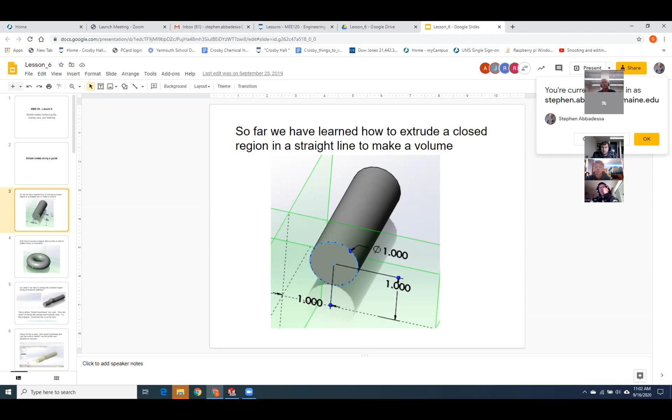So, sweep along a guide. So far we have done extrusions where we drew a closed region and we just pushed it out in a straight line to create a solid body like this piece of rod that I'm showing. Okay, that was an extrusion. Then we decided we're going to draw a closed region and we're going to spin it around some kind of a hinge point or axis. And those were the bodies of revolution. Those were, you know, the wine bottle, the donut, all of that stuff. And those were fun.

Today, we're going to do something different. We're going to do a closed region and we're going to push it along an irregular pathway. And these are called sweeps. So you can imagine this circular profile goes along this irregular guide. And the thing about it is that this profile always stays perpendicular to the guide.

So as we come into this rounded section right here, it begins to tilt back on itself, which is what you're seeing right here. The profile stays perpendicular going up around the top, it creates the hump, and then it goes back and stays straight toward the end. Okay.

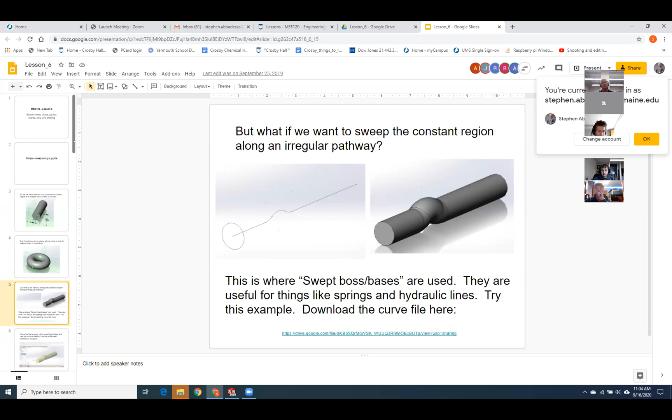If you guys want to follow along with me in the lesson 6 folder, we have something called a Jeep frame. Why don't you go ahead and grab the Jeep frame, download that. And when you open it, you should have something like this. You should have a sketch 1 and a sketch 2.

Uh-oh. I might have to re-download mine. Okay, that looks better. So what was bothering me is when I was prepping for the lecture today, I had moved this guide curve down to the bottom to show you how it could fail. This one should actually work quite well.

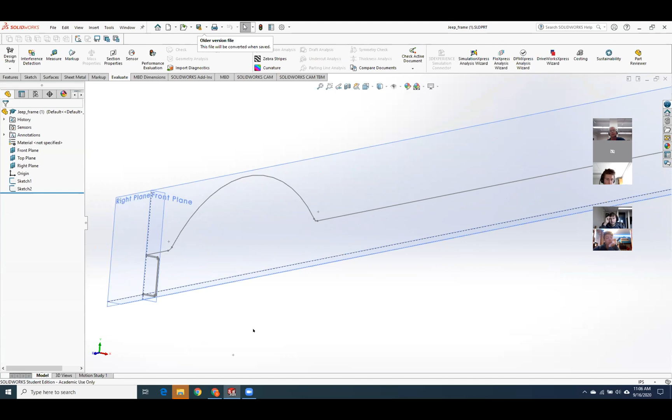Okay, so let's actually do one of these sweep along the guides. We're going to click on the Features tab and we're going to come up to Swept Boss/Base. You get a dialog that looks like this. So we're going to do the profile first. That's going to be your cross section. What is the constant cross section that you're going to move down along the guide?

Then below that, this is the pathway. This is your guide path. We're going to choose up there. And when we say OK, we get this. And this is actually what a World War II Jeep frame side rail looks like. I actually copied the dimensions off it.

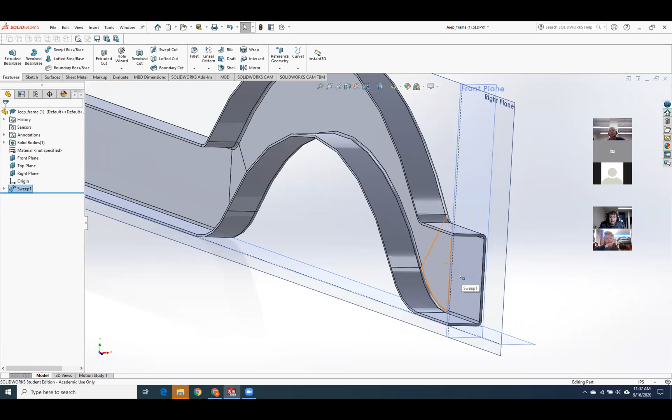Whenever I need inspiration, I go out to the barn and I look around and say, okay, what kind of junk do I have in the barn that I can torture the students with?

So the car actually uses a piece of 1/8-inch thick C-channel, and the tires would be right in here. So when the axle goes up and down over a bump, it moves into this hump and right in here.

Okay, now sweep along guides, they can be a little bit problematic. These generally can be fussier than extrudes or revolves. Extrude and revolve almost always works. The problem with sweep along guides, there's some pretty advanced stuff. And if you get the profile doubling back on itself, you can cause a sweep failure. And let me demonstrate that. So you saw that this sweep worked fine.

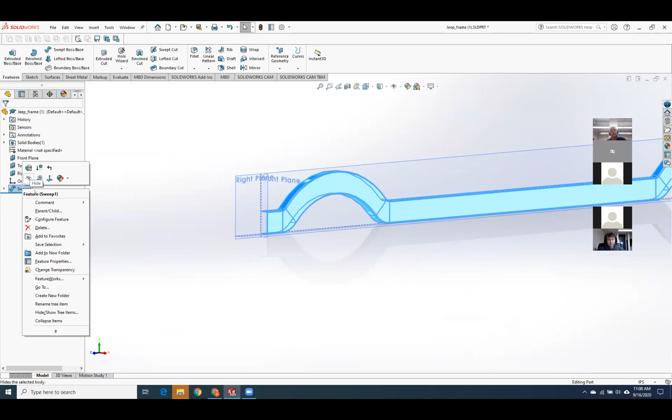Let me delete the sweep feature. And the reason it worked fine is that this profile went down the guide curve, the bottom swung out, so the material as it was being created was not doubling back on itself. It had plenty of radius here where it's not doubling back, and then the bottom kept swinging out. Okay, let's look at what happens when it does double back on itself.

If you go back to the folder, you're going to see something called failed Jeep frame. Go ahead and download that one. And the only difference between those two is that I've moved the guide curve from up here to down at the bottom.

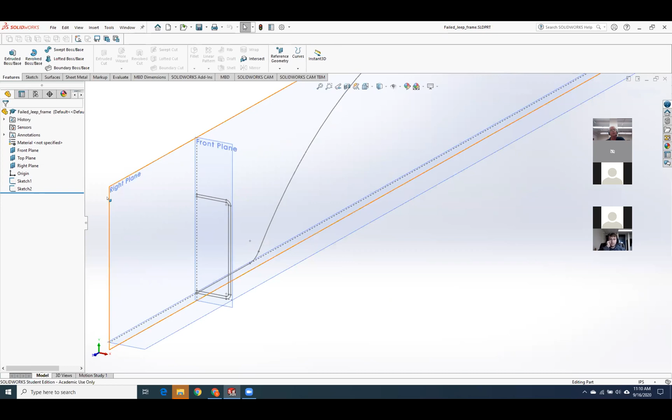Okay, otherwise these two are exactly identical. So let's try it just to make sure that it does in fact fail and I'm not lying to you guys. So swept boss or base, we'll choose the top one, the profile, which is your cross section. Sketch 1, the guide path. Choose sketch 2. We'll say OK. Sweep operation failed to complete.

And what's going on is that as this profile moved down the curve and it tried to always remain perpendicular to the guide curve, it was upright right here, and then the top started swinging back on itself as it went through this tight curve going up. And that created an undefined solid.

So a lot of times, if you're doing a sweep and you get these rebuild errors, sweep operation failed, take a look at it, try to get it so that as the profile remains perpendicular down the pathway, that you're only stretching the material out and you're not doubling back on yourself.

Okay, that's probably a pretty hard thing for you guys to visualize right now, but you're going to be doing a ton of these. When we do the Stirling engine project, I'm going to want to see all of the little wires that connect the Stirling engine, crankshaft going to the balloon piston, and I want to see the little twisted ends. So you're actually going to do the twisty ends, and I'll show you how to do that.

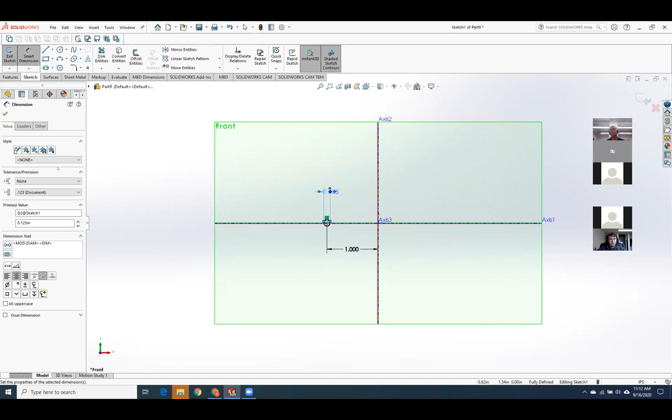So let's see, we'll make that 1 inch. And we will use some 1/8 inch wire. I have a fully defined sketch. My graders will not be mad at me, so that's good. Okay, now we've got to create a helix or a spiral. And we actually have a built-in feature in SolidWorks for doing that. But you have to start off with a circle to define how big the helix is going to be.

So I'm going to create another sketch on the top plane. And I'm going to draw a circle from the origin right at the center out to the center of my wire's cross section. And notice that because I gave the center here and I stretched it out to the center point of my wire, that set my diameter, and I automatically got a fully defined sketch. So I've got location and I've got diameter, all set by geometric relations.

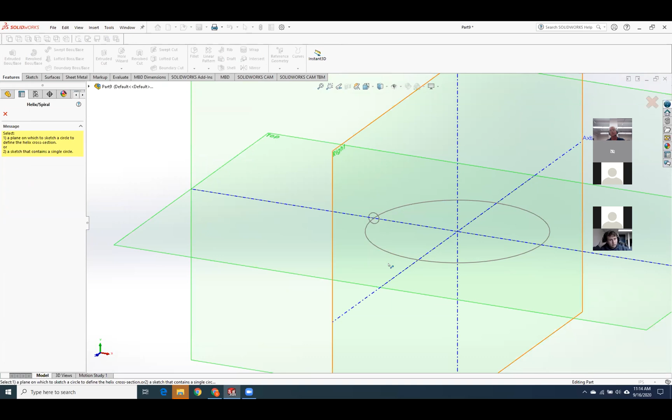Okay, cool. That's all nice. So to get to the Helix tool, we're going to say Insert. We'll come down to Curve. And here's the Helix tool. I'm going to choose my circle that represents the center of the diameter of the spring. And we have all kinds of stuff over here that we can set if we want to.

So pitch. This is how far up I go for every turn. So for every 360 degrees on the helix, I go up 1/2 inch. Revolutions, I've got 4 turns on my spring. I can also change my start angle. For right now, it looks pretty good. I've got the start of my helix right in the center of the cross section of my wire. That's pretty nice.

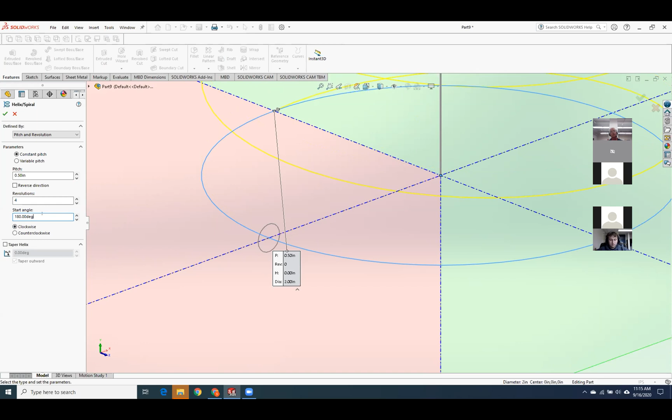If it were over here, I could change the start angle. Okay, so now my helix is starting over there. That might be useful. But I'm going to put it back at 270. So that's all you need. This is by the pitch and revolution method. You can also set the height and the number of revolutions. So if you wanted to say, give me a 2-inch spring with 4 revolutions, starting at 270, you can do it that way. All kinds of options, however you want to define it. I don't really care. We're going to say OK.

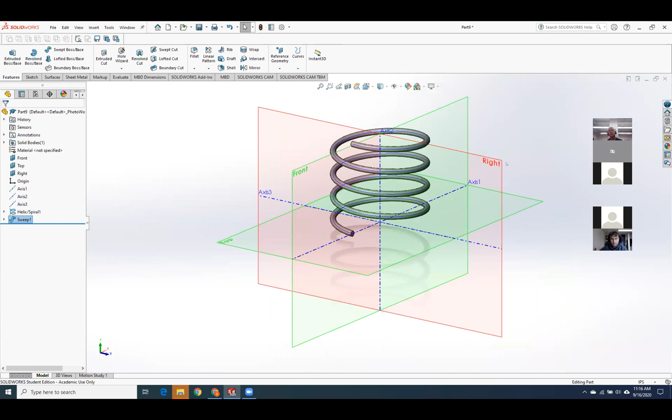And now we'll do our sweep. So we'll set our profile with a little circle. We'll set our guide curve by picking the helix. And magically, we have a spring. Okay, yes, go ahead. Where was that tool? Which one? Swept boss or base or helix? The helix. Okay, so go under Insert, go down to Curve and Helix. Fantastic, thank you.

Okay, so that's pretty much the classic spring, sweep along a guide. So when you guys are out in the world and you're working for Ferrari and you've got to draw, say, the hydraulic lines for the brake system, anytime you're doing formed tubing, like hydraulic lines, really good time to think about sweep along a guide. Hydraulic lines, springs, any of that kind of stuff. Transfer pipes. Exhaust pipes, absolutely. That's where you're going to use this stuff.

All right, let's see what else I've got in your lesson plan for today. So we drew the spring. There's the video if you want to see the spring drawn again. Okay. So are there any questions on that, folks? I know that was fast, but again, until you start practicing this stuff and just start using it, that's when you really, really learn it.

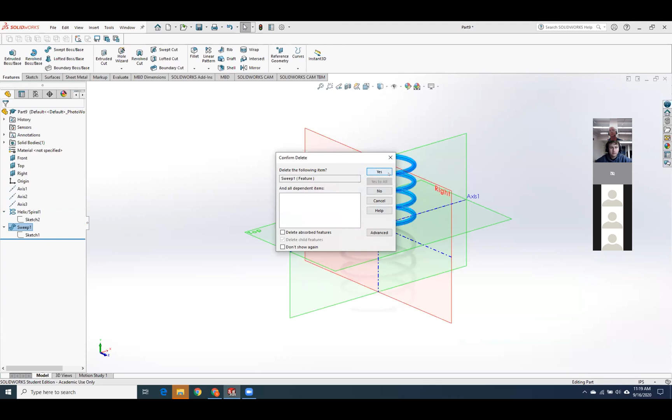So I'm trying to do the spiral on my own again. Yep. So how do I get the circle to go along with the spiral? So the first thing you're going to do is you're going to draw the circle. Yeah. Okay, so I'll get rid of the sweep. Oh, it's two separate commands? Yes. Okay, that makes sense. Yeah, so you draw the circle. That sets the diameter of the helix. So draw the circle, use the helix command, and poof, then it will appear.

Okay, thank you. So if I want to change the diameter of my helix, well, I've got it tied to the wire. So what I'll have to do is go into sketch 1. If I change how far out the center is, so that changes the diameter of my circle that generates the helix, and then the helix gets fatter.

I know that this is kind of not with the lesson plan, but in regular springs, you know how the ends are kind of flattened out. How would you do that? How would you manipulate the end of the spring so that the top and bottom are flat like a regular spring? Okay, so the technical term for that is called squaring. And let's actually do that. That's not a bad thing to do.

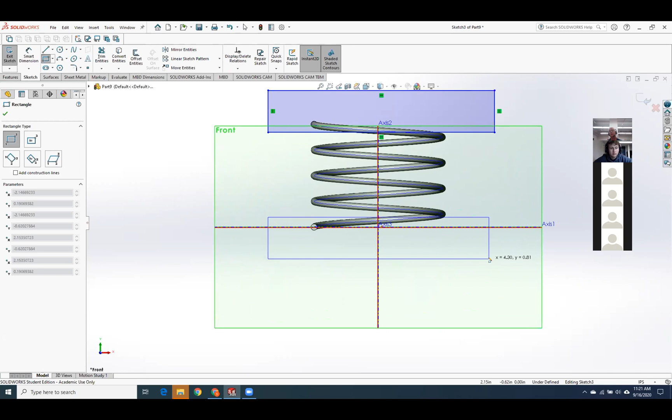So I'm going to sketch on the front plane. I'll do a normal to. I'll put a box up here. I'll put a box down here. Fully dimension it as always. And let's see. And then your question is actually really well timed, because the other thing is helixes, while they're really cool and they're pretty prevalent out there, they are a bear to position in assemblies. So I should probably show you my little trick that I use for doing those.

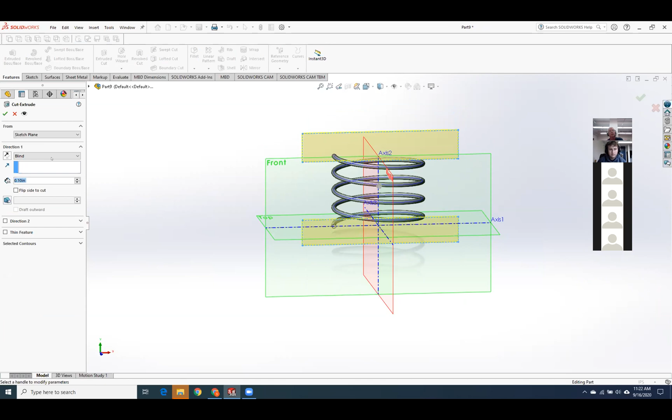Okay, and let's see, I need to go to, okay, fully defined sketch. I'll get out of that sketch, and I'm going to do an extrude cut. This time I'm going to be a little bit slick. Instead of blind, I'm going to do mid-plane. So what it's going to do is it's going to cut in both directions. And I'll say 2 inches. Oops. Need a little more. Let's just do 5 inches. Now I really know I'm going to cut through it.

Okay, so that's the cheap way. And you can see that you end up with this kind of razor edge out here. So when you go to some place like Lee Spring or one of the other big spring suppliers, this curve will actually be curved flat. That's called squaring. And then sometimes you'll want an actual flat surface. So like on a car engine, most of your springs on the last turn are flattened like this. That's called grinding. So a lot of times in a high performance application, you'll get a squared and ground spring.

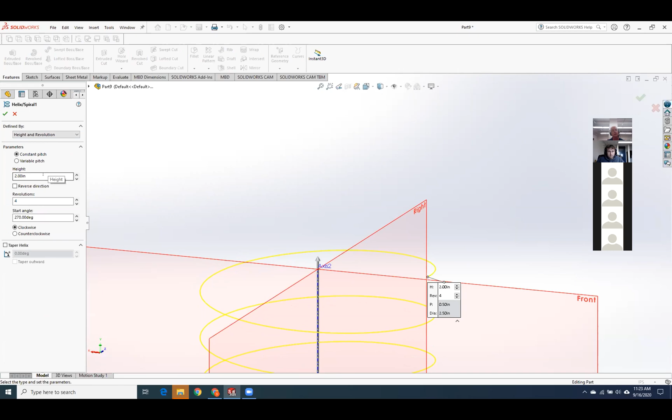Let's see if we can go back into the helix and try and, I don't think it lets you, well, you might be able to do it under this variable pitch. You'd have to play with that because honestly, I didn't prepare to go into this in this class. If you want to see it, send me an email. I'll make an auxiliary video and send out the link. And then we'll see if we can do a proper squared and ground spring. Okay, thank you.

And the other thing, if you want to change the direction of rotation, you can go either clockwise or counterclockwise and reverse it. Okay, so that's helixes, folks. And this is how you're going to do the twisted ends for the push rods on your Stirling engine. I have a question. How do you adjust where the helix sort of starts? If that makes any sense. Okay. Yep, that was the start angle thing. Get rid of that. We'll get rid of this.

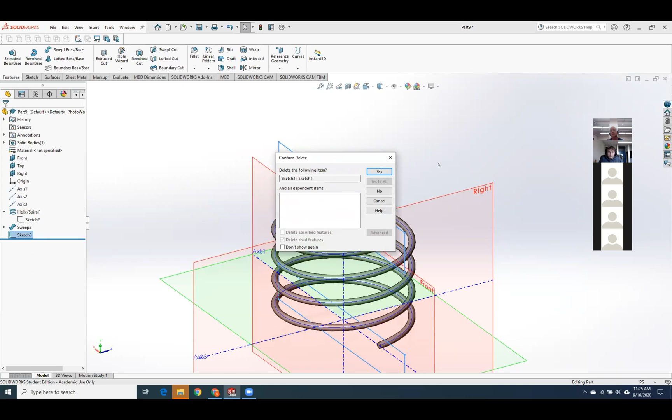We'll go in and we'll edit our helix. So right here at start angle, if I change this, see how it's spinning around right now at the bottom? Yeah, I see. That's how you change where it starts. Great, thank you.

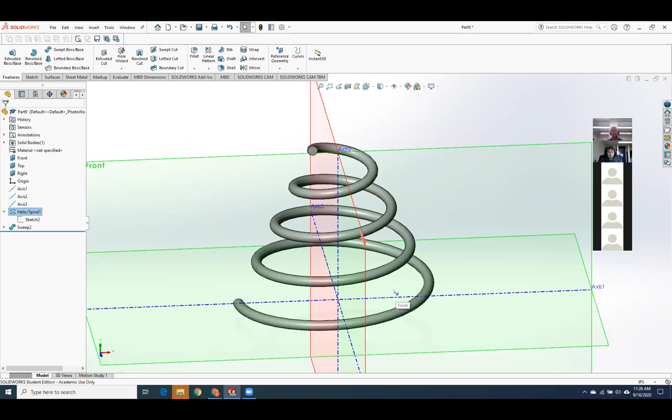And the other one that I've used occasionally is this tapered helix. Maybe something like that. This would be like the contacts on the top of a 6-volt battery, something like that. I've also noticed that my GTO has tapered springs like this. So if you've got a high lift car engine and you want all of these spirals to be able to go down flat or push within each other, a tapered helix is nice. Rarely used, but it's nice. It's out there. You can do it.

Okay, planes and axes. That will be our next topic. So, what happens when you don't have a surface to draw on? And that is when you start relying on planes and axes. Okay, so what I'm showing you on the screen right now is something called a pipe Y. And if I just start a new part, we have our three principal planes. Nothing is shooting off at 45 degrees that's going to let me draw this thing.

So we're going to do this example, and I'm going to show you how to draw this 45-degree pipe Y, and we're going to construct a bunch of planes and axes that allow me to rotate my drawing angle and then draw this branch coming off. So let's start a new part.

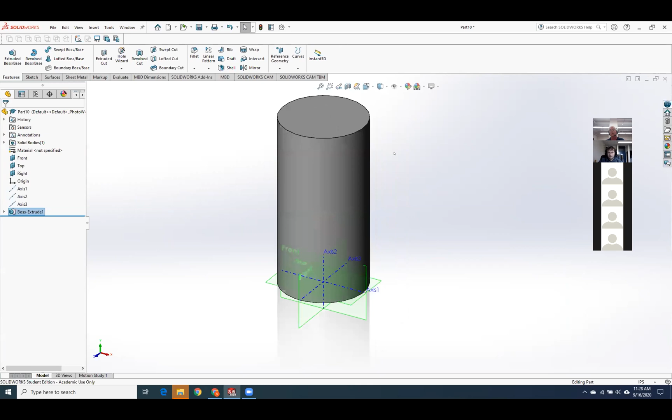We'll start with a sketch on the top plane, and we're going to draw a standard 6-inch pipe Y that almost everybody has in their house. Okay, fully defined sketch, good to go. We'll extrude that. Let's make it 12 inches tall. Nice. But I still have nothing to draw on to make that 45-degree branch. So here's what I'm going to do. I'm going to create another plane that's offset at a distance up here.

So I can come up to reference geometry. I'll click on plane. I'll choose that one. And if I choose just a plane, then I'm going to get another parallel plane at a distance by default. And that's what I'm seeing over here. So I'm making an offset plane at a distance of 3.9 blah blah inches. If I've got it on the wrong side, you can do the flip offset. And for now, I'm just going to say 4 inches. And that gives me a plane up here.

Okay, now I'm going to drop in an axis. And the axes are going to act like a hinge pin. So axis. And I want it to be at the intersection of this vertical right plane and this horizontal plane 1 that I just created. So you remember from high school geometry, the intersection of any two planes is a line. And that's exactly what you're seeing right there. I'll say OK. And now I have another axis in place.

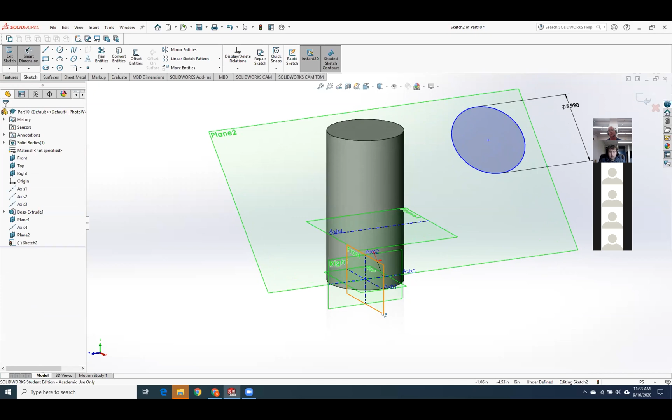I'll say OK and accept it. As always, smart dimension it. So let's see, I'm going to do 5.99 inches instead of 6, and I'll show you why in a moment. So now I've got to make sure that it aligns with the center pipe. I'm going to do that with more smart dimensions.

Okay, so now I've got it centered there, and I want to make sure that I start inside the pipe, so I've got to go vertical. I'll go from the center here, and I'll go off that axis. And let's see, 4. I've got a little bit hanging out.

Okay, just checking the chat, guys. Feel free to stop me at any point if I lose anyone. It's not hard, but it is all new material for you guys. Yeah, I'm still struggling to kind of figure out how to get the planes to be set. I don't know if you could go back and. Yeah, absolutely.

So let's get rid of sketch 2. Get rid of plane 2. Because yeah, this is probably some of the weirdest stuff explanation-wise in the whole course. I mean, I've been doing planes and axes since before there were planes and axes. So it's second nature, but somebody coming in, I don't know how you learn this stuff other than do it, do it, do it. Okay.

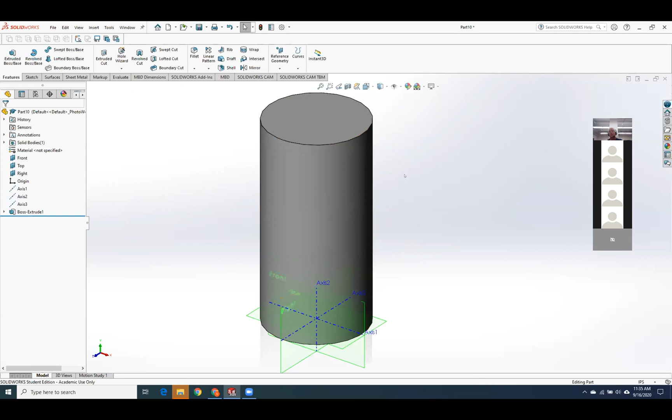No, I didn't make the reference axis, so I couldn't find something to revolve about. Okay, so you don't have plane 1. You want to see that again? No, I've got it now. I didn't add the reference geometry axis. Okay. So I'll bring that back, and then the angled plane was the one that's a little bit odd. So I've got 3 references over here.

My first reference, I'm going to choose plane 1. That automatically assumes an offset plane, but I don't want that. So I'm going to choose a second reference, and I'll choose the axis. So that makes it go right through the axis, and then I'll set the angle. Now I'm going to sketch on plane 3. Oops. And then I'm going to locate that circle so that it's on the center line of the tube. Then I'm going to bring it down so that it's inside the tube.

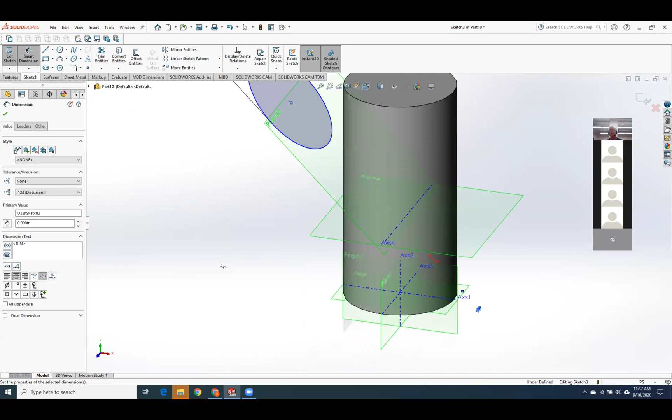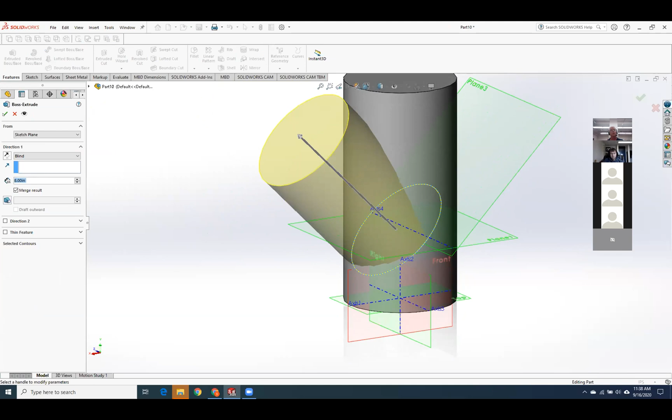Go. So that looks pretty good. I'm fully defined. Get out of the sketch. Now I'll extrude it. It's a little bit long, but it's just a number. That's a little short. Yeah, that looks good. Okay. So now we have something that's more like a pipe Y.

If you guys remember back to the wine bottle example, because the wine bottle could have a uniform wall thickness, we were able to do a shell. Okay, we're going to do a slightly fancier shell on this one. So again, I'll go up to Features. I'll come over to Shell. This time I'm going to cut through this face, and the bottom face. I'm going to pierce all of those faces, and I want it to have a uniform wall thickness of 0.1 inches. I'll say OK. And now I have a hollowed out pipe Y.

So that is how you do planes and axes. Okay, and planes and axes, admittedly, they take a little more time to get used to. So that's how you do planes at an angle, planes at an offset. Let's do another example. I had a quick question on that one. Yeah, shoot, Sam. What was the reasoning for 5.99 instead of 6? Okay. So if you get edges exactly on edges, sometimes it can cause solid model failure. So let's go back to sketch 3. Let's try and make this 6 and see if it actually works this time.

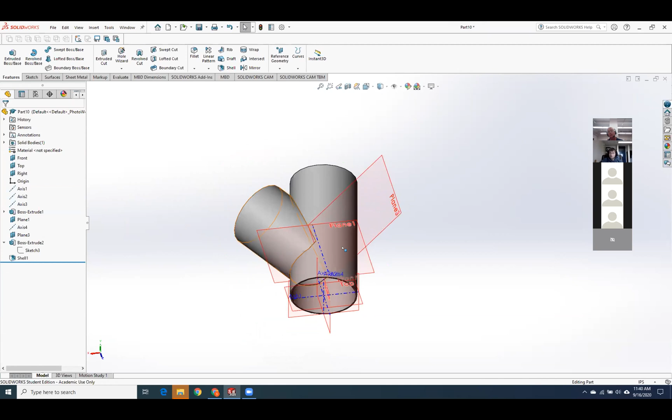See how I've got some little weird sliver face right in there? That can cause things to blow up and not work properly. So let's try and change the shell thickness. A 6-inch pipe really more like a 1/4 of an inch wall.

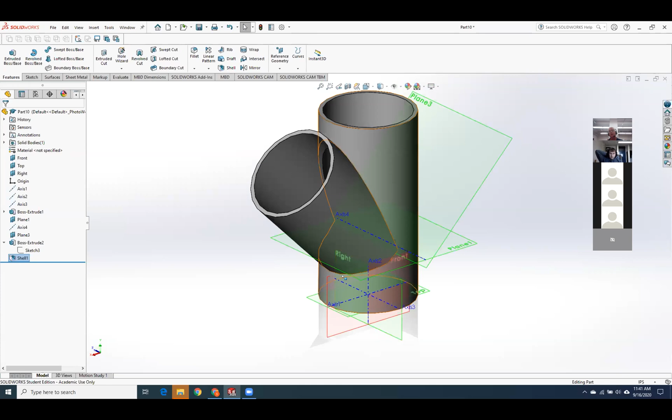This one is well behaved. I was seeing some weird video stuff right in here earlier. Sometimes you have weird edges coming together and incomplete join-ups like right there, and you may have to mess around a little bit. But this would be fine to go to manufacturing, because this little sliver may only be like the height of a sheet of paper thick. So we don't worry about stuff like that generally.

On your homework, you're going to have to do a drive shaft, and you're going to have to put keys at a particular angle into a drive shaft. Let's go over how to put a plane on the surface of a cylinder at a particular angle. That one is not really obvious.

Oh yeah, and I did look into the multiple cylinder Stirling engine thing as well. Yeah, Gage, the issue with the constraints of the Stirling engine is that they operate in a straight line. You plan on using tea lights to power them? Yes. The issue with the tea lights is I don't think they'd burn properly at a 45-degree angle if I wanted to make a V6 engine out of Stirling engines. It'd be weird because you'd have to have them angled to have them all operating the same crankshaft. One of the problems you'll run into with these engines is they have such little limited power - any kind of friction just causes them to stop, unless you start playing around with seals and really good stuff.

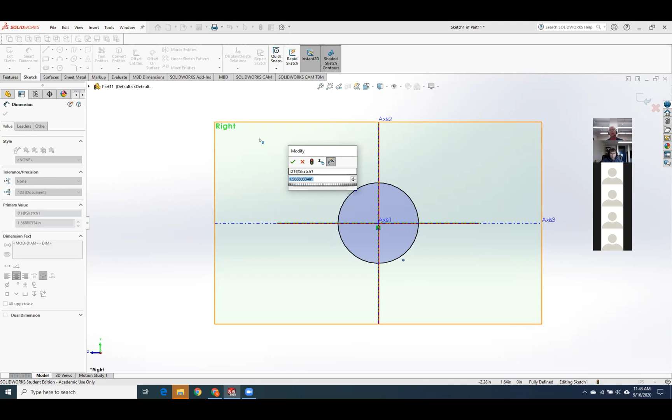All right, so let's see, let's do a 6-inch piece of rod. And let's get rid of - nah, I guess we'll keep that. So I got a piece of 1-inch shafting here on the screen. I've got the planes going right down the center line, but if I want to cut a keyway into the top surface by doing a cut extrude down into it, nothing I've got here is really good for that.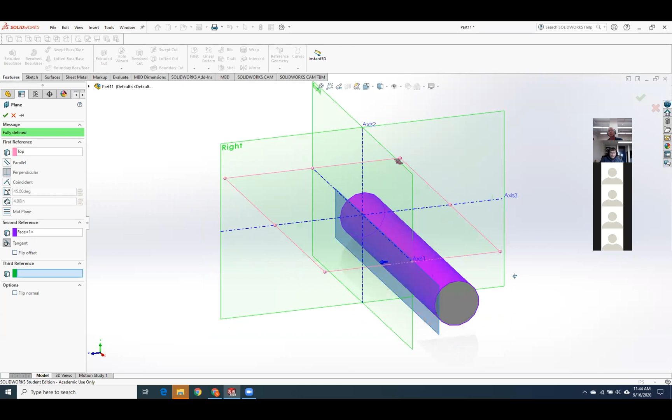So let's put a tangent plane right on the surface. I'm going to choose this plane, and I'll choose the cylindrical face, and that drops in a tangent plane. Now I can adjust the angle, and as I change the angle, you can see it spins around tangent to the surface. So let's see, 300 - so now I've got a nice plane right on the surface, 45 degrees to this plane and this plane.

So you're probably saying to yourself, how am I going to remember all of this stuff that he's just thrown at me? Well, I made you a little table to try and make it more digestible. For example, if you want to create an offset plane at a distance, your first pick should be a plane or a flat surface, then just specify the dialog. For rotating at an angle to a plane or flat surface, pick a plane and a linear edge or axis.

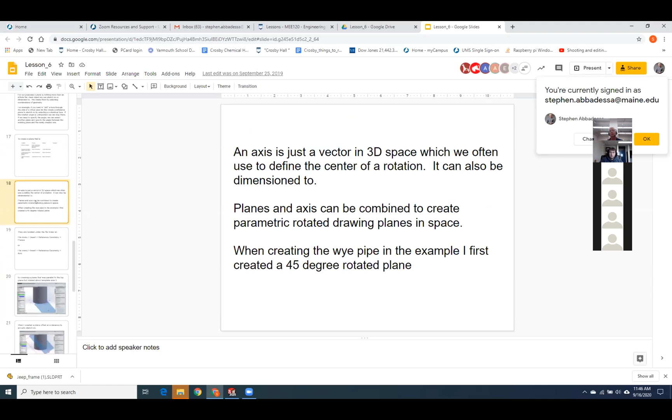If you want to do a mid-plane, centered between two parallel planes or surfaces, just pick the two flat surfaces or planes. And if you want to be tangent and at a specific angle, you've got to choose the cylindrical face you want to be tangent to, and then a flat plane or surface to set the angle. So just come right back to this little chart that I've made you - these are the only ones you're going to need to know for this course.

So that was planes and axes. Let's do a mid-plane example, and then I'll get you on the homework because there's probably going to be a bunch of questions on the homework. I want you guys to have plenty of time for working on stuff without struggling too much.

Okay, let's start off with the Venerable Block. We'll go 2 by 4. And we'll extrude it 1 inch.

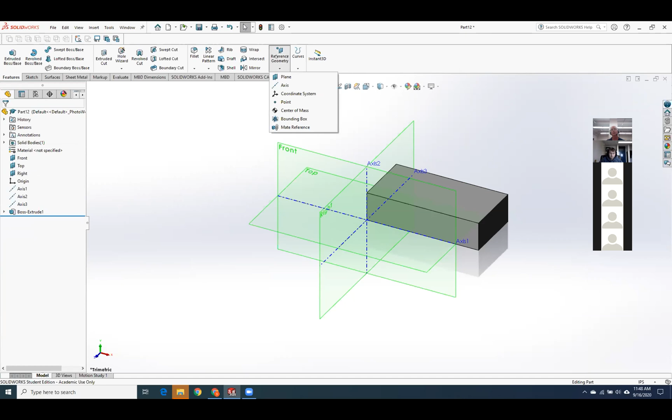In the previous table, I showed you guys that if you click on 2 parallel faces, it will drop in a midplane. So I'm going to do that right now. We'll go up to Reference Geometry, choose Plane. I'll choose... I grabbed axis 1.

Okay, so now I've got the face, and it did exactly what I expected. So when I click on the face, it suggests an offset plane. I'll spin around. In the second reference, I'm going to come over here, choose the other face, and then it drops in a midplane right here. I kind of like this. I find that anytime I need something to stay centered, this is a really good way to keep it centered.

So now let's drop in some holes. I'll pre-select the top face, use the hole wizard. 1/4 good enough. I can dimension to that center plane, so I'm going to put a dimension of 0.

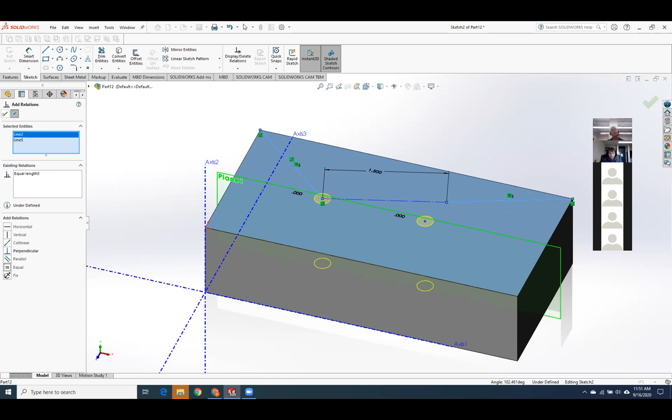And I'm going to add a relation that says these 2 lines are equal, and I will make that horizontal. Okay, so you accidentally attached that 1.5 not to the hole point, but to the line point. I need to make this and this coincident, which I would have expected it to grab automatically. Okay, and that's what went wrong.

Okay, so let's make some changes. Let's change this to 1 inch. Still centered. Still centered.

This is one I actually use a lot, this idea of coming into the locating sketch in the feature and adding in this little bit of construction geometry. Because there's a lot of times when you'll have a mating part - maybe this is an exhaust flange or something like that - and you really want to maintain a certain distance between the exhaust bolts, but you want to stay centered on the face or the feature. This works really nice.

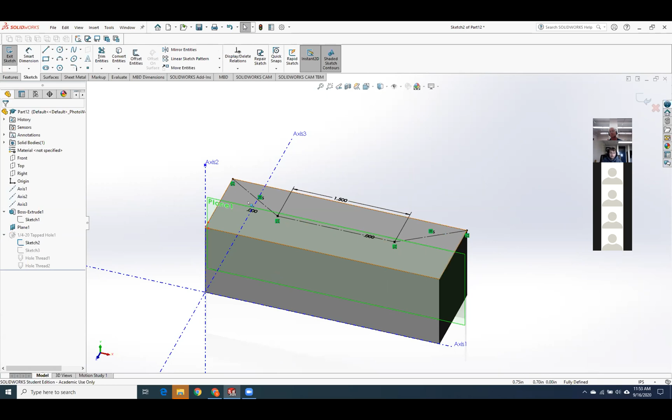Okay, so that's mid-planes. And I could do the same thing on the 2 ends if I wanted to. I could put a mid-plane right here and then put my hole right at the intersection of 2 planes. A bazillion ways you can do this stuff. Okay, so that's mid-planes and use of construction geometry to maintain centering. If you really need a nap and you want to see that again, there's the video.

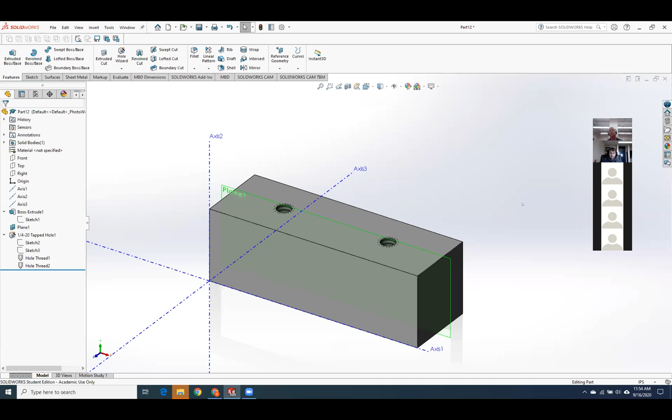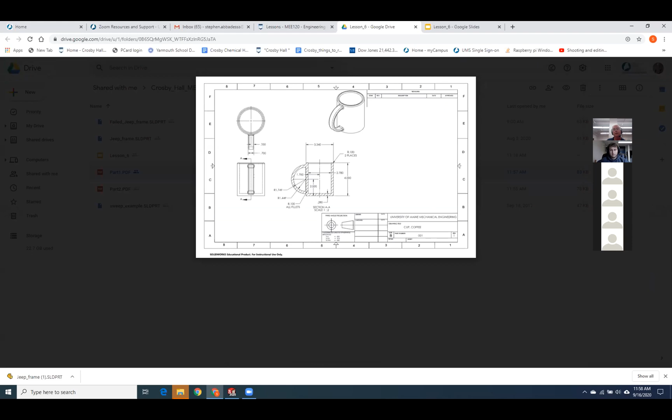So before the filleting, the cross section of the handle is more of a rectangle. It is a rectangle, yes. Okay, because I was just looking at it like, if I did a slot, it would pretty much outdo the filleting. But if you do want it filleted, then yeah. Yeah, I do want the fillets. And where you've got a circular radius on the outside and a circular radius on the inside, and a square profile, a rectangular profile.

So you could take the difference and just make that the height of your rectangle. Yeah, so you take the difference of the two radiuses, and that's the thickness of the rectangle. Then you put that around a semicircle.

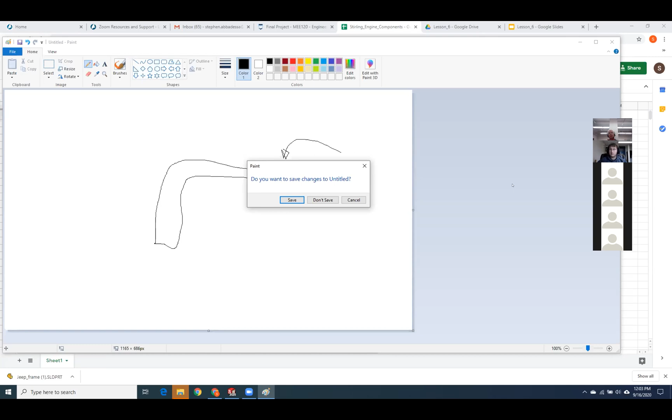And then when do you think we'll have the skills we need to complete all the drawings or the models? You have them right now, actually. Fantastic. Yeah, so you've gone through bodies of revolution, so you should be able to draw the cans. You've got extrusions, you've got sweep along a guide, so you can do all the push rods. Yeah, you guys are good to go to start modeling.

And then when are we going to get the bags? So I would encourage you to start modeling, draw the cans as best you can with a ruler, draw the push rods. I'll give you some better dimension on the foam displacer discs so you have something to draw there. Boy, this COVID thing's annoying.

Did you say you were going to have to pre-make the crankshafts, or are you going to have us also design those too? So the deal with the crankshafts is they're made out of welding wire typically, and you've got to do a 3/8 bend offset to drive the displacer up and down, and you've got to do a 3/16 bend offset to go down to the balloon.

And I do have a forming tool, but that's going to be a problem. So I would say just do your best with it. And the way I did it was I just printed out the crankshaft blueprint, full size, 1-to-1 scale, and I used that as a bending template. Okay. Until I got lazy and then CNC'd one. But you could also make your own if you want to 3D print a bending tool. I mean, that's doable.

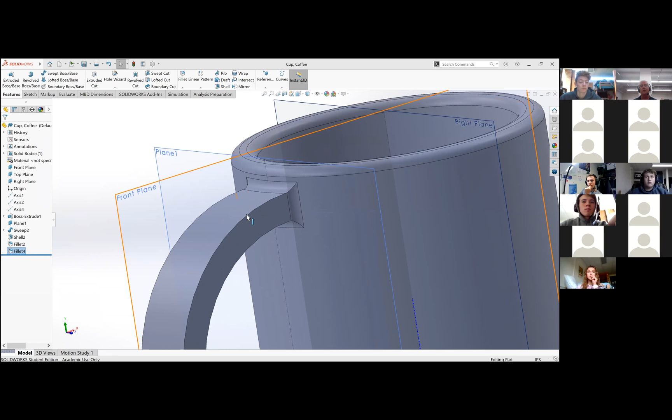So what's going on there is the order that you apply the fillets is important. So you need to fillet the handle first, then fillet the intersection between the handle and the body of the mug. So blow away fillet 4. Yep. Okay, now do the handle. Okay, so you fillet like these edges? Yep. Right here?

Good. Yeah, and the inner ones. See if I can. Yep. And do I hit OK, or do I do the edges of these now? I would put those on first. So say OK. Okay. And now do between the handle and the body of the mug.

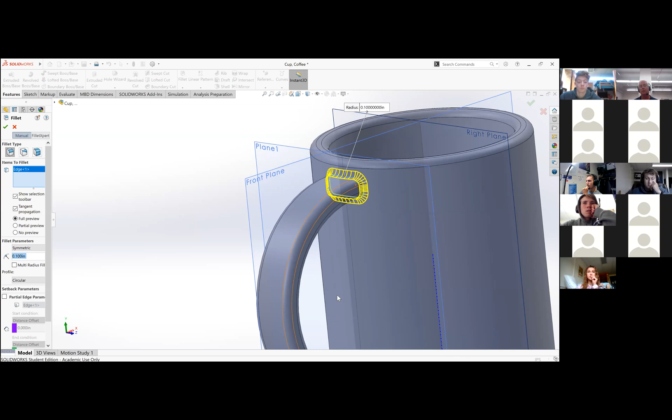Yeah, that looks better. Nice. Yeah, it should tangent propagate right around. Yeah. Perfect. Okay. Thank you. All good.

For that shaft, those slots are to be done using the hole wizard, correct? No, I don't care how you do it. If you want to cut extrude those, that is totally fine. Okay, because the hole wizard wasn't allowing me to dimension the way that the drawing has it dimensioned. So, good.

No, you should be able to. It's just when you try to dimension that way, it grabs right from the rounded edge, and you have it measured from not the rounded edge, but right before it goes into the rounded edge. I mean, as long as you get the geometry right, that's the big thing that I care about.

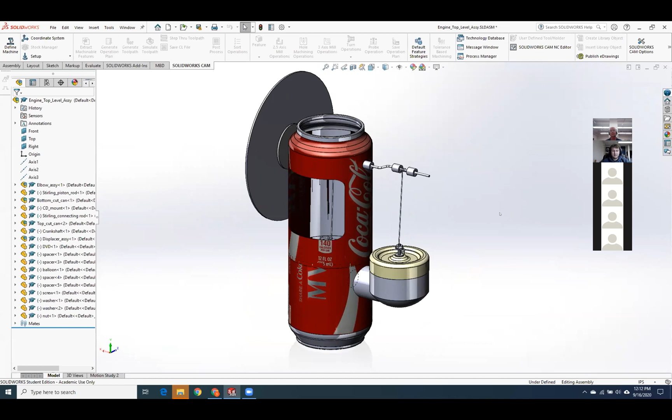Are we going to need to do that too? You don't have to. Some of your video cards probably won't allow you to, but it does look cool. And I put the JPEG in so that if you want to try wrapping it around, you can. But yeah, that kind of looks like a swept helix right there. That might be important.

And here's all the components that I drew piece by piece. Can you show the bottom side of that Coke can? Yep. Looks like the bottom of a Coke can. Oops. So it's got the proper indent. It's got the proper bulge right here.

I mean, I may have to make some COVID concessions this year just because, last year everybody had calipers available so they could get this information. If you guys are doing it with just a ruler, you know, there's only so much I can realistically ask of you.

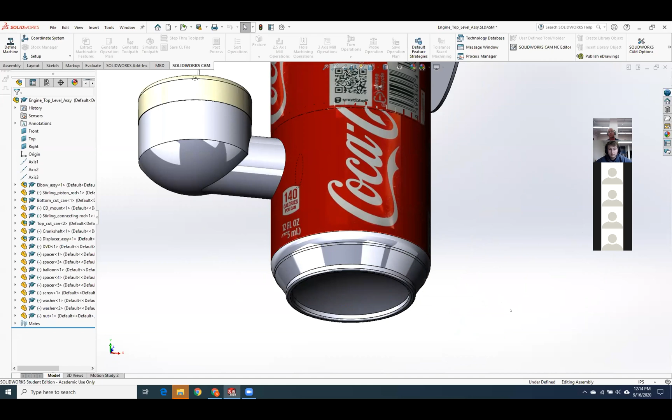And then for drawing the models, does that include making the full assembly? Oh yeah. So I've got this, and then I've got a full set of blueprints for actually putting it together, putting in the glue right there, or if you want to use double-sided tape. And then here's what's inside.

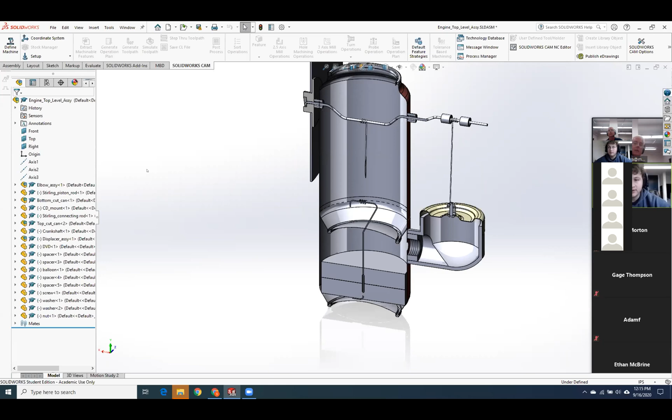And will you give us the parts once we have the model done? Yes, absolutely. Okay, awesome. As soon as you show me a good plan for how to use it, it's all yours. Yeah, as long as I know you're not doing a hack and then draw, that's the big thing I'm looking for.

Do people generally take about 3 weeks to draw the models, like you have in your example here? I don't think it really takes that long for you guys. So I drew this in an afternoon. So I generally use a factor of 4. So it takes me a quarter of the time it'll take you guys. And that's if you're really, you know, headlong into it, know exactly what you're drawing.

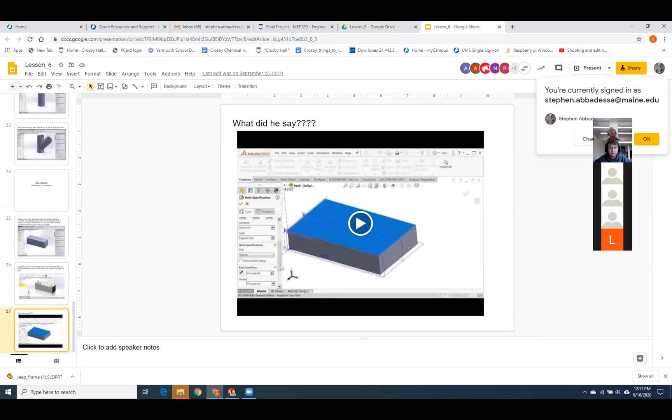And could you remind me how to do the 45-degree offset for the crankshaft? Sure. Okay, so first off, you want a 45-degree angled tangent plane, right? Okay. So if we were not all together, then where you would find that information is back in the presentation, slide 17. Rotated at an angle to a plane or flat surface, no. Tangent at a specific angle. So you would want this bottom one, but let's demonstrate it since we're here.

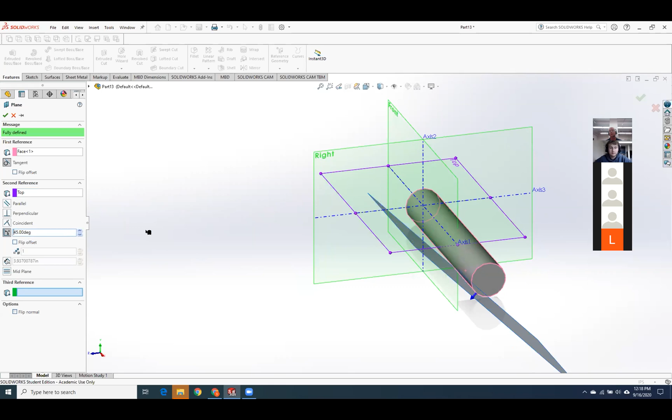So I'll go to reference geometry, I'll grab a plane. First, I'm going to choose the cylindrical face that I want to be tangent to. And then I'm going to choose the plane that I'm going to establish the angle from. That'll be my second reference. I'll come back to the angle, set it to 45. Okay, thank you.

Hello. Hey, Aiden. Okay, look, it already looks like you've done what I'm gonna ask, but... No, keep asking. That's what they pay me for. When you guys run out of questions, I'm unemployed, and I really hate that.

Okay. So I've done the first keyway, and I'm attempting to plan out the second one. Okay. Can I share my screen? Sure. So that's what I got so far. I'm trying to rotate this one a little bit up here, like what the blueprints are entailing. So then set your angle. Go click on the angle button. There you go. So I see. Is that a problem here? Two planes, only a point can be selected. Is it because I built it on top of the other plane?

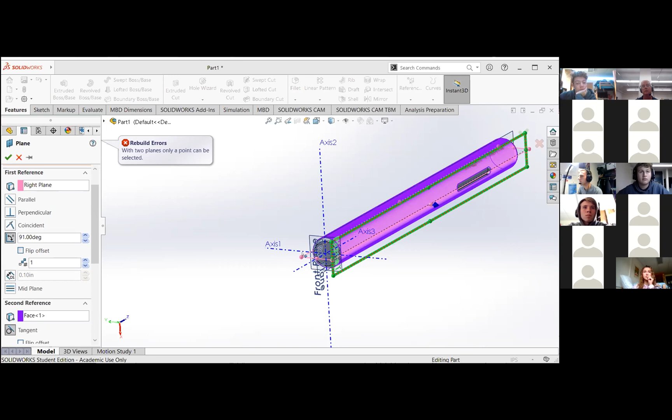No, I'm just not sure what face one is. So I tell you what, let's do this. Face one is just the shaft itself. Okay, so it's the cylindrical outer face. Yes. Okay, and then you've got the right plane. That should be fine. So yeah, you should be able to rotate that slot right around now. So go ahead and do the up and down on the angle. Why? Tell you what, just go ahead and get rid of that plane. Let's just take it from the top.

So the first thing I'm curious about is, what did you shell? There's no shelling in this part. Oh, there isn't? No, no shelling in this part. Oh, okay. Solid steel rod. Right. So let's get rid of that. Okay, much better. And then the ends are chamfered, not filleted. So on the edges, yeah, go ahead and get rid of that. Right. There you go. Much better.

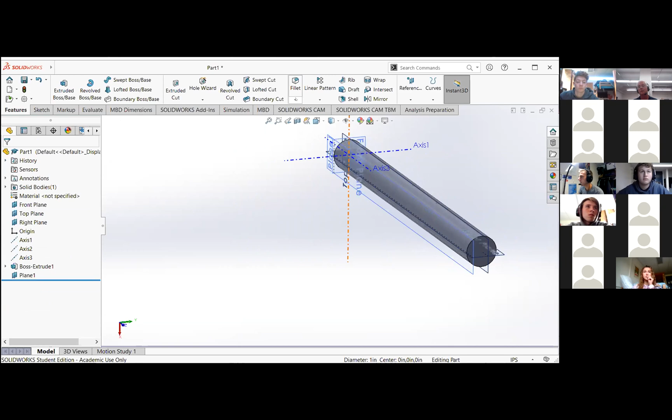Okay. Oh, didn't set the chamfer distance. Right. Wow. Okay. Yeah, so the chamfer distance should be 1/8 inch. Go down the bottom where it says the little D. There you go. Okay. Change that 0.39 blah blah to 0.125. There you go. Okay, much better.

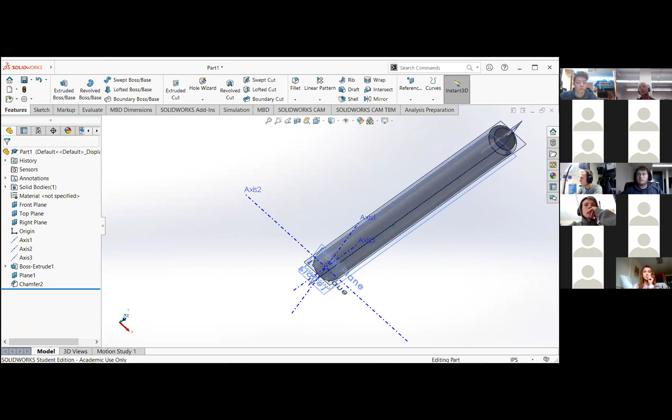Okay, so you've got, I see that plane 1 in there. Yep. Okay, so you could put a slot on that. So if you choose, let's go up to reference geometry. And we'll choose a new plane. Mm-hmm. Now choose plane 1. Good. Go down and click on the second reference. Choose a cylindrical face. Okay. Now click on the angle so that we don't just get a perpendicular. You got to click on the little angle button. There you go. Change that to 45 degrees.

Right. Press enter. Beauteous. So now you've got a plane that you can draw on that's 45 degrees from, in your case, plane 1. All right. Thank you. And then just say okay. Nice. All good. All right. Thank you.

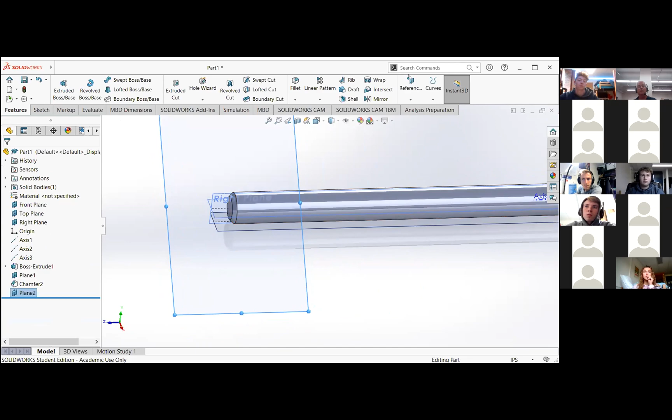I have a really quick question. Sure, go for it. So, the top part of the mug, is it an arc from the sketch, or should it be a fillet? Fillet. Okay. Yes. So if you look at, make sure I'm sharing my screen. So on the mug print, I'm showing that on the top drinking edge, you have a radius of 0.1 inches, both on the outside and on the inside. Okay, thank you.

And guys, while we're looking at this print, notice that the center of rotation for the handle is not exactly tangent to the body of the mug. You'll find it's off by just a little bit. So make sure you get that center properly drawn.

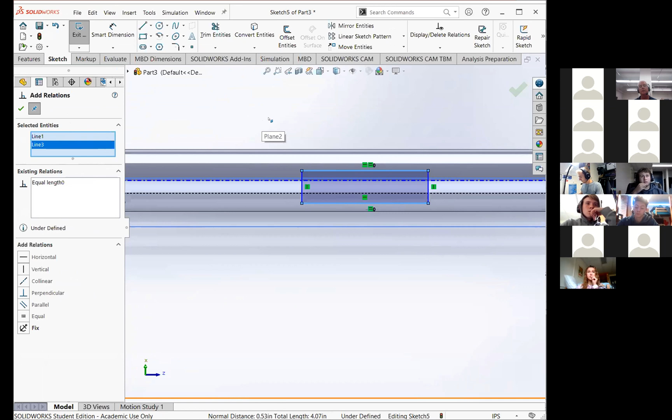I think it might be RealView graphics. No, that's generally for photo rendering. Oh, okay. It was doing some weird stuff to my screen when I had that turned on. Yeah. But now zoom out, please. You still got a reflection there, but I don't know if I'd call that a shadow. Try clicking it back on. I think you can also turn off the reflection.

Oh, there we go. Okay. Yeah. Sweet. Yeah, I never cared for that bottom reflection thing either. Yeah. The shadows made me absolutely crazy, but for no good reason.

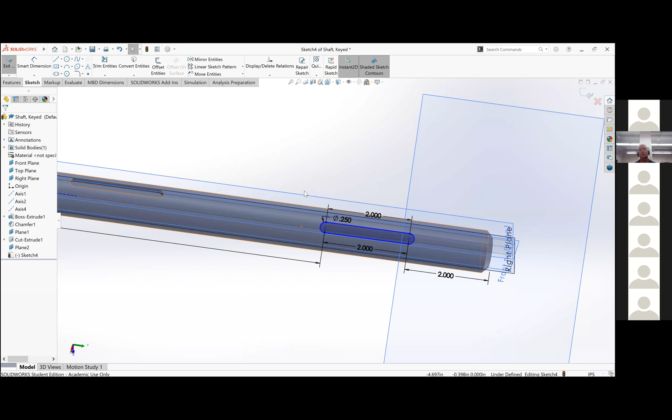I have another question. Shoot, Ethan. Can I share my screen? It's all yours. Okay. I'm trying to make the second keyhole that's at 45 degrees from the first one. Okay, so first off, just a matter of nomenclature, they're called keyways. Keyways, okay. Okay, so yep.

So I made my plane. I didn't really have a problem with that, but I just can't get it fully defined, or it keeps getting over-defined. Okay, so if you try to grab a line and drag it, what does it do? Okay. So put in a smart dimension that keeps you on the center line.

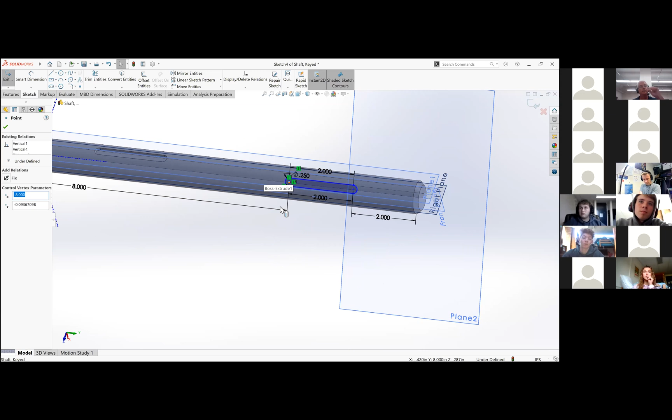And I would click on like the end of the shaft so that you go right to the center. Or you might be able to even click on axis 2. That might be a good choice. Oh, wait. So, should I put 0? Yes. Or, okay.

Okay. I think that's fine now. Yeah, without being able to spin it around, it looks good. Mm-hmm. Okay. I think that's probably good. Thank you. Okay.

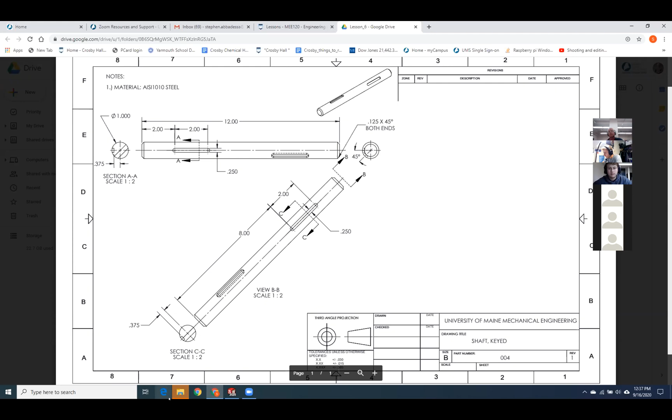Could you trim it off along the line that's the same depth as the shell of the mug? No, because the shell of the mug is constantly changing. It's cylindrical in that direction. So how would you know how far to go in to make sure that it goes into your model, but not so far that it sticks through the other side? Honestly, I'd spin the model around and look.

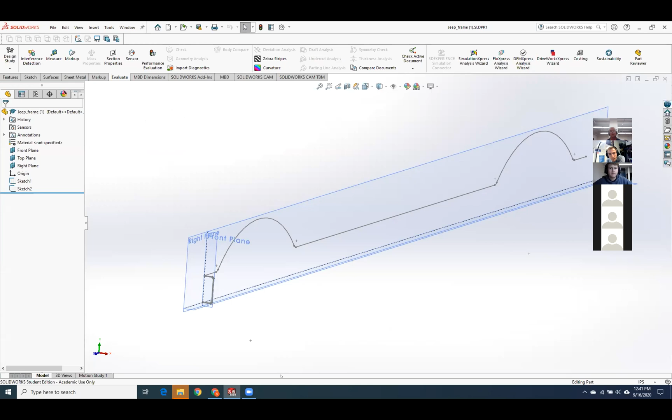So when I try to trim my circle, it just takes away the whole circle. All right, let's try this. Let's do an example. You guys all see my screen okay? Yeah. So I'll do a trim. I'm holding down the left mouse button. Something like that. And then you would just extrude that? Yep.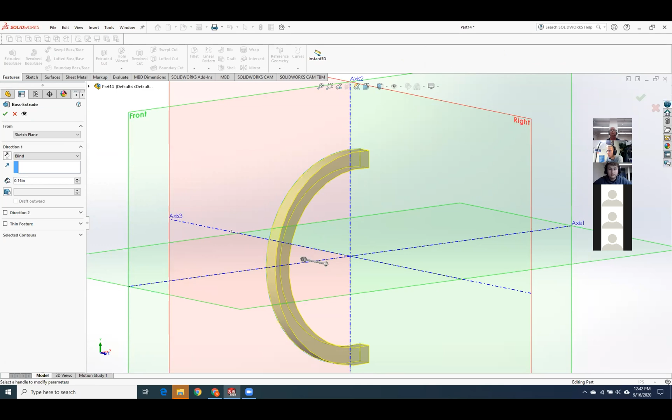So now there's two things you got to be careful of when you do the extrusion. If I do a simple extrude, I've got mine on the front plane, so it's all coming out in one direction. There's two ways you can handle that. If you have the body of your mug centered on, in my case, axis 2, then either I can put an offset plane off this plane by half a handle width and then draw into the mug, or when I do the boss, instead of saying blind, if I say mid-plane, then it goes both directions. And now I stay centered on the origin.

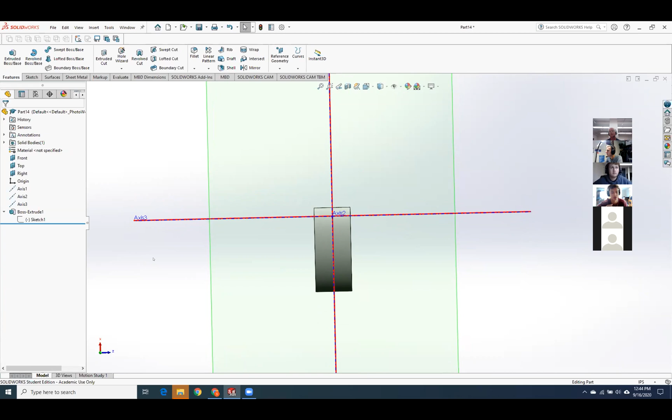The value that you put in the extrude for the mid plane, is it the whole width or the amount you go each direction? You know what I mean? Well, let's see. My handle width is 0.16, and my D1 is 0.16. So yes, it goes halfway in each direction. Whatever you type in for a number here becomes the total width of your feature. Got you, thanks.

Another UMaine alert? Come on, guys. Yeah, this is far more of the class format that I like, where I talk half the time and then give you guys half the time to do the work, run into your problems. Those first couple lectures are like making you guys drink from a fire hose. Say, ah.

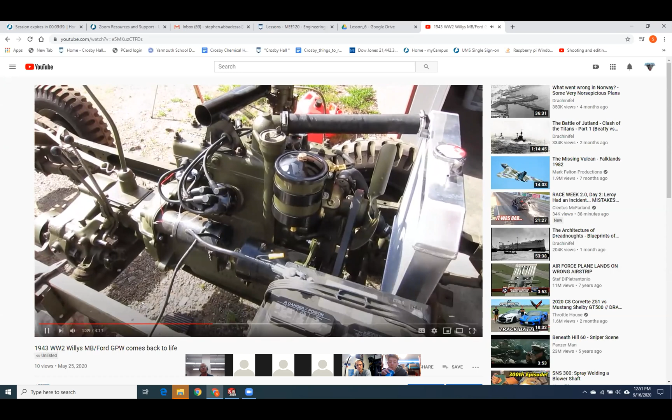So this engine probably hadn't run in about 50 years. All right, enough of this. There's my 54 in the background, CJ-3B.

70-year-old carburetors don't hold fuel worth a damn. Okay, so there is my mindless obsession.

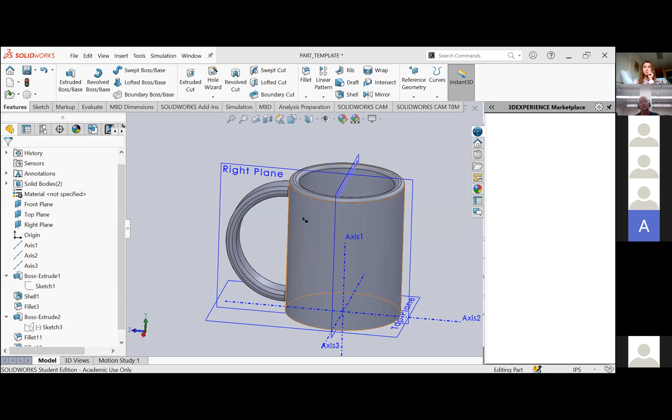All right, so you got a little gap going on. Yeah, how do I fix that? Well, the more relevant question is how did you make it? So did you do a boss extrude for the handle? I just took the right plane and offset it from the front plane by the radius of the cup itself.

Show me the top view. Let me look down into the cup. Okay, that looks fine, it's on center, so that's good. Now show me the sketch that makes the handle.

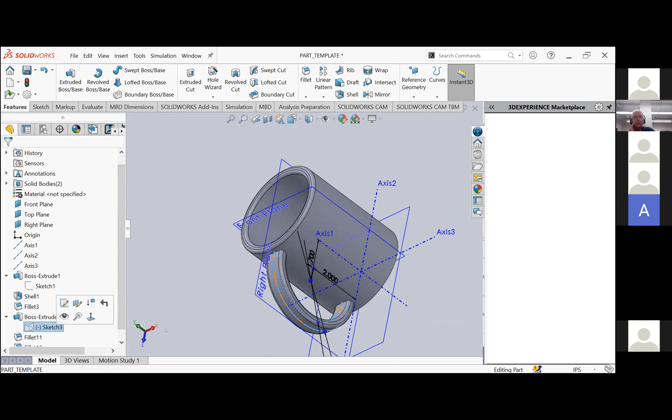Okay, so what you got going on, see those vertical constraints? Actually, no, that's not a problem. Grab the top vertical line in that sketch and drag it to the right. This one? Yep.

So if you pull that into the cup by half a cup thickness, by 0.14, then it should be completely inside and you won't have that gap. Okay, so I should just offset it by half of what the cup thickness is. Right. And do the same thing on the bottom. Okay, thank you. Yep.

I have a quick question. Yeah, Logan, go for it. When you shell out the cylinder and give the wall thickness... Okay, so which cylinder, what problem are we talking about? Sorry, for the coffee cup.

When I made the circle and extruded it into a cylinder, and when you shell it out and set the wall thickness, does that apply to the bottom as well? Yes, it does. Shelling is fine, it's 280 thickness everywhere. Okay, sweet, thank you.

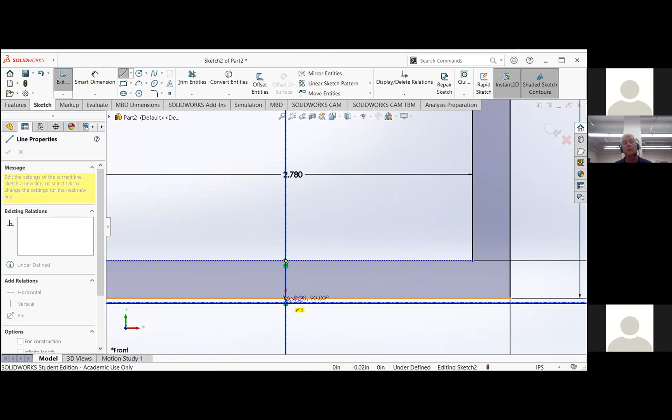Okay, let me just go through here and get rid of everything on that side. Okay, and there we go. I just got to define it. Yep.

So the other thing is you got to locate it in space. Yep, there you go, good. I'll just sit it on the plane there. Okay.

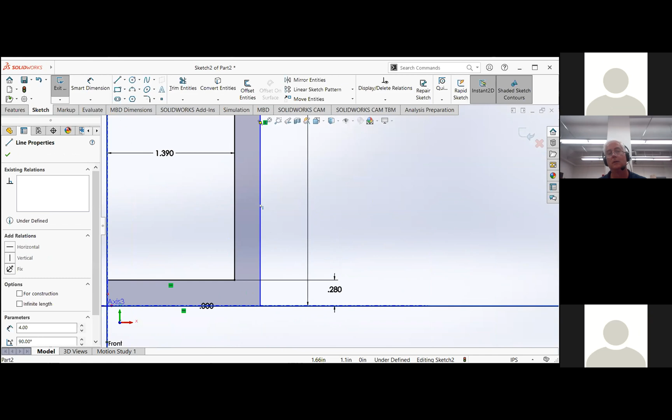Why is this line? So if you don't know what to do, grab it and try and drag it. Yeah, okay, I see. There we go. Almost, still underdefined. Not there... oh, there it is. No.

So drag that line to the left again. I was really liking what you were doing there. Okay, good.

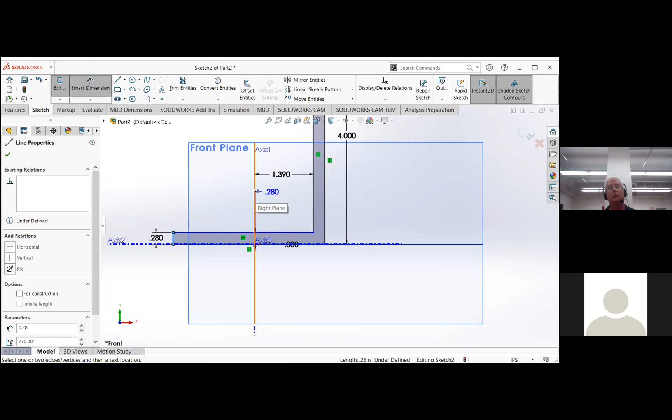Let's get rid of this one. Just smart dimension that to the axis. Okay, nice, fully defined, thank you. Yep.

Axis of revolution is this one. Here we go.